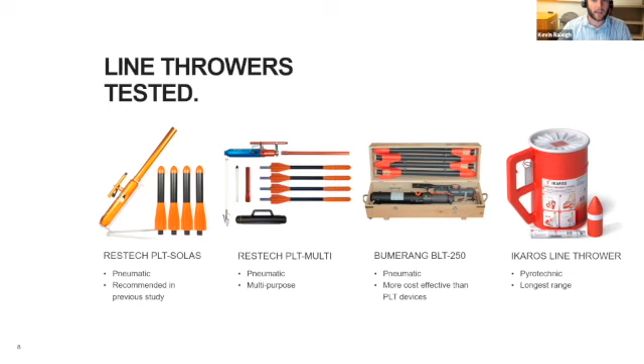What we were looking for when testing these devices were four main categories. We identified these before the trial: ease of use, which we broke down into ergonomics - how does it feel to use these devices, is the user impeded in any way by its form - and weight, similarly, is the device too heavy to be aimed accurately.

Effectiveness we broke down into the range of the device - how far can it fire, can it allow the tug to sit at a safe distance when it fires the projectile to the disabled vessel - and then accuracy and wind deflection. We need to be able to hit the disabled vessel, hopefully on our first try, so we want these devices to be accurate and reliable.

In terms of reliability, we wanted to look at how uniform the range was - was it hitting about the same distance every time, or was it all over the place? We need to know that these devices are going to perform as expected every single time.

How easy were they to reload? And then finally, what was the safety like? Did the operator feel that they had full control over the device, or did they feel that there was some sort of risk while they were firing it?

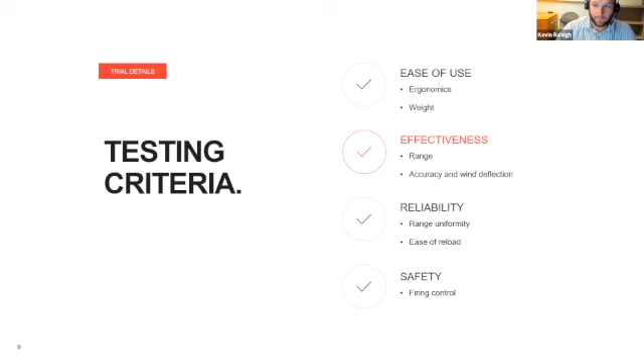During testing, a couple of criteria came up that we felt we really needed to add to our analysis that we hadn't anticipated. These were the crosswind line deflection. So what I mean by that is when we're firing perpendicular to the wind, we noticed that even when the projectile flew straight, the line attached to it was often caught by the wind and drifted downwind and missed its target. I'll show that more clearly on the next slide.

The other item we identified was the build quality of the devices. We didn't anticipate that the materials and manufacture of these devices would have such a serious impact not only on their performance, but also their safety and reliability.

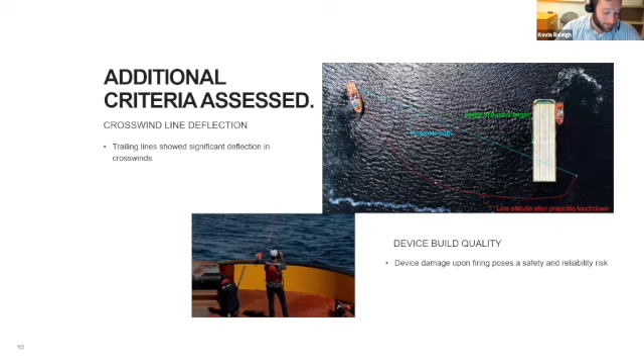So I wanted to show the line deflection in action. This is an aerial view of what our test looked like. On the left, you can see our rescue tug where we fire the devices from. On the right, you can see the barge made up to the other tug, simulating our disabled vessel. We're going to fire the Ikaros right over the top of the barge.

You can see the projectile as it's fired goes clean over the barge and lands right about there in the water. It's kind of hard to see on screen, but after firing, the line was still in the air and got caught by the wind and dragged all the way down and around the barge. So even though the operator fired directly over the barge and landed the projectile in the water on the other side, in a real world scenario they would have had to fire again to get the line on the barge of the disabled vessel so it could be picked up. That's why we had to identify this additional criteria.

Similarly, we identified device build quality as an issue. For example, when the Bumerang was fired, because it was made of plastic, it sort of blew apart upon firing, and the pieces not only posed a safety risk but also impacted the performance of the device, making it fly not quite as well as the other devices we tested. You'll see the Bumerang now as I play this, and as it's fired the rocket breaks up, parts are thrown across the deck, and the remaining part didn't fly quite as straight as it should have.

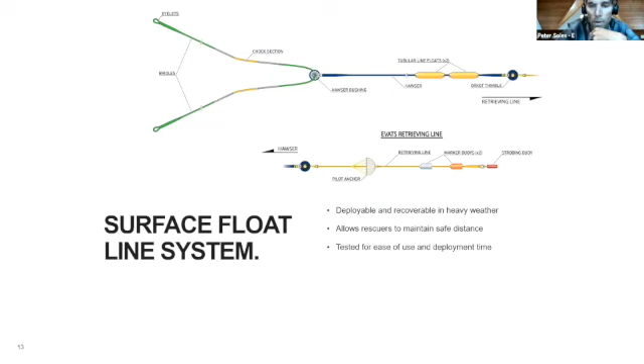So to evaluate a surface float line system, the one we opted to look at, since these aren't manufactured all over the place, and in a lot of cases they're almost stovepiped on deck, improvised. But Samson does make the EVATS system, an emergency towing kit that Glosten actually developed as part of a previous project.

That kit in itself is kind of like the Alaska emergency towing system. It's a complete towing kit, and what we wanted to do here is isolate just the retrieving line. So that upper piece there with the green bridle and the blue, that's the towing gear, so we left that part out of it.

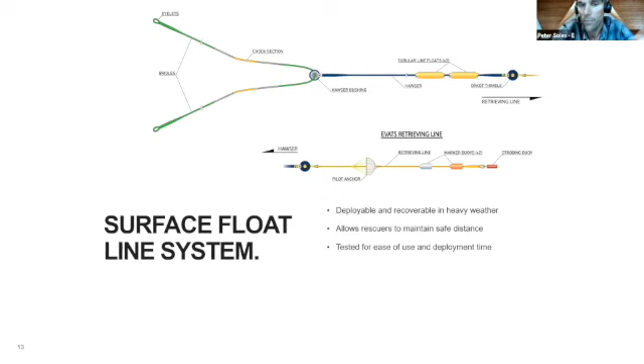If you advance the slide a bit, Kevin, this is what we looked at and evaluated as a surface float line. We had Samson manufacture this for this trial. What sets it apart from just being a piece of floating rope is namely that it has this drag anchor spliced onto the body of the line towards the end. This schematic is a little deceiving because the line is actually over 100 meters long, and the pilot anchor and all these floats and such are out towards the end.

As Kevin mentioned earlier, and he'll demonstrate this in a bit, when that pilot anchor inflates as the barge is drifting downwind, it pulls the whole retrieving system up in a straight line upwind, where a tug can swoop in and toss a grapple between those two floats and recover the system at a safe distance.

So this is what we looked at as far as the surface float line system. It's one component of the broader EVATS kit, so don't confuse those two. What we're looking at here is not EVATS, it's just representative of how a surface float line system should be constructed.

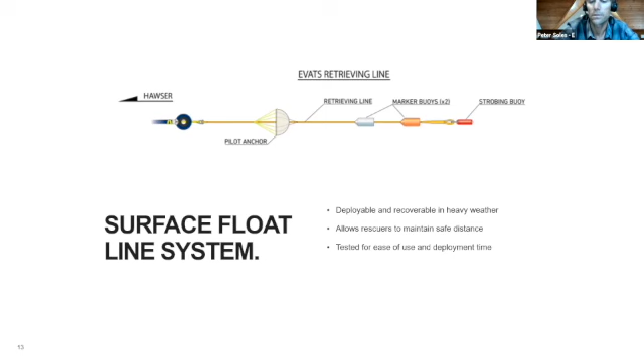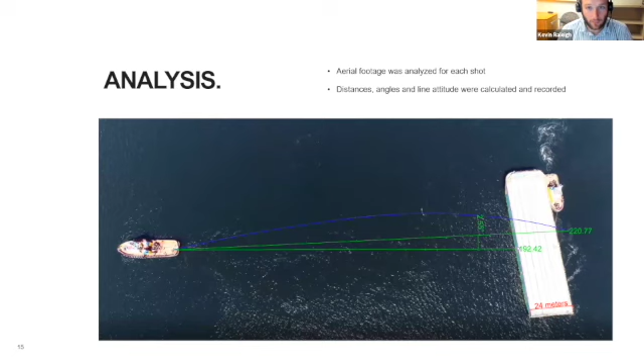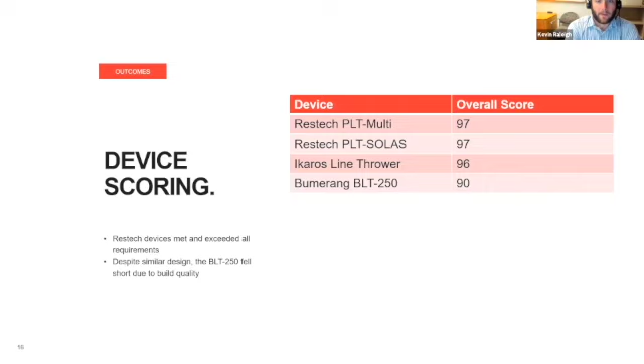The reason I want to pull up these scores is to identify one point about build quality: the Restech devices and the Bumerang were nearly identical in design and function, both pneumatic devices, but the Restechs really outperformed the Bumerang specifically because of build quality issues. The Bumerang's performance suffered because of things like the projectiles breaking and the housing not being made to the same spec as the Restech devices. That's a significant thing to consider when looking into these devices.

I'd like to talk more about what we can take away from those scores. You might have noticed all the devices scored within the 90 to 100 range, because they're all quite effective at doing what they're meant to do. But the real differences came from their range and accuracy ratings. Their fundamentals in terms of ergonomics, weight, how easily they were reloaded, and safety were all very good — they all performed quite well. But in terms of range, that's where their differences really showed up.

The pyrotechnic devices have a distinct range advantage. Every time we fired them, they went clear over the barge, really outperforming the others in range — which isn't to say the pneumatics did poorly. They met the test requirements, all hitting the barge or going past it as expected, but the pyrotechnics really shone in the range category.

On the flip side, with accuracy, the pyrotechnics, largely due to their design, were the hardest to aim and seemed most susceptible to deflection. Part of this had to do with the shot line attached, which was not quite the same quality as the pneumatic devices, leading to it being pulled downwind because of more windage. The pneumatics, on the other hand, were incredibly precise, very easy to aim, and didn't suffer the same wind deflection, or at least not the same magnitude.

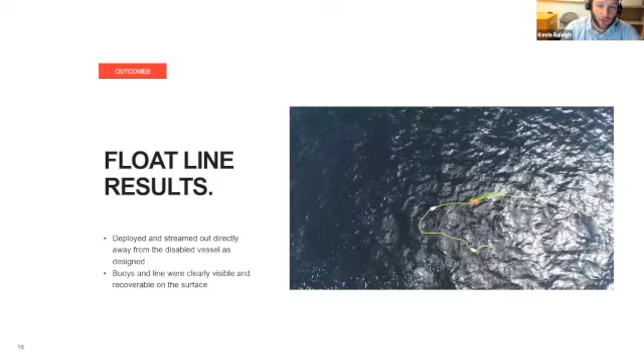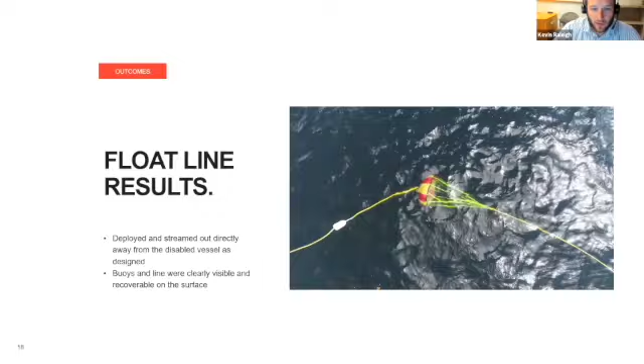Like Peter mentioned, I'm going to show right now the pilot anchor as it's being inflated in the water. You can see right at the top there, in red and yellow — it's sort of an underwater parachute, and it's going to catch the water and start to inflate. That's what lets it drag in the water behind the drifting ship and allows the line to stream out. There it is, fully inflating, and you can see the line almost getting taut as it's being pulled away behind the barge drifting.

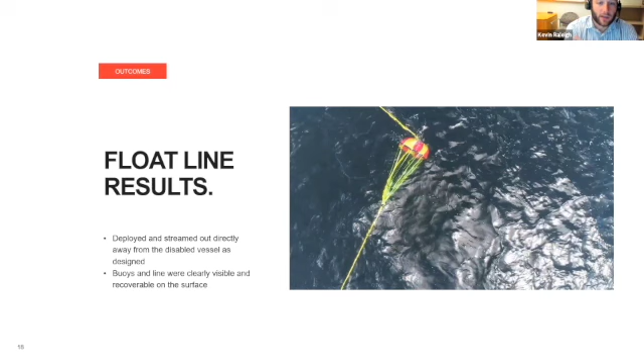So that is ideal for a situation where you have a disabled vessel that can drop this in the water and allow it to stream out while a rescue tug is coming to recover it, before it's even come to the area that the disabled vessel is in.

So let's talk just a little bit about the significance that comes from these results. I'll start with the pneumatic devices. As I've said, these were highly accurate, they were easy to use, and they hit all of the points we set out for them perfectly. They really achieved what they set out to do.

And for the purposes of this council, I'd like to point out the benefits of having a passive projectile. It really makes them ideal for tanker operations. It adds a lot of peace of mind to not have to worry about having some sort of flaming projectile going towards a tanker vessel, both in terms of the cargo and in terms of the crew.

So you're going to see here your own Alan Sorum firing one of those devices towards our barge. And it goes straight over. It might be a little hard to see on your screens, but it went clear over the other side and landed the line right on the barge.

The pyrotechnic devices really can't overstate their exceptional range capability. In another use case, these would be excellent in open water where you're not worried about flammable cargo.

They were slightly more difficult to aim. As you can see there, Peter's got one on his leg, and that's how you have to fire it, from the thigh. So you can't exactly aim down the barrel like you could with the pneumatic devices, which made them a little bit harder to aim and harder to get that accuracy. And as I said, the incendiary projectile is the real safety risk there. So you can see how the propellant comes out here when it's fired.

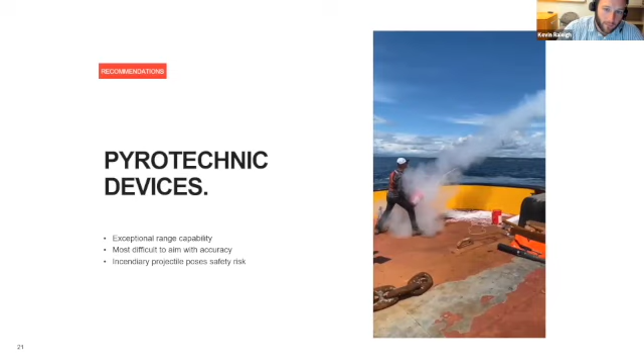And don't worry, we've got another video of Alan firing one too.

So as you can see, it goes clear over the barge. If you can catch it on the other side. Yep, you can see the line deflection there too that Kevin was talking about, where immediately it just starts blowing downwind, because this particular nylon line they used was twisting as it deployed, and so that created a lot of extra windage.

It's visible right here in this video, so it's kind of interesting. Yeah, that's an excellent point and another perspective on seeing that line deflection. So here it goes. You can just see it spooling out to the right, like Peter mentioned.

In terms of the surface float line, as I said, it performed exactly as expected. You can see the way that it's deployed out straight away from the barge. This is exactly what you want with a disabled vessel, because it gives the rescuing tug a ton of room to come sweep in and pick up the line. Yep, and they can stay on the upwind side, which is where you want to be. You don't want to be on the downwind side.

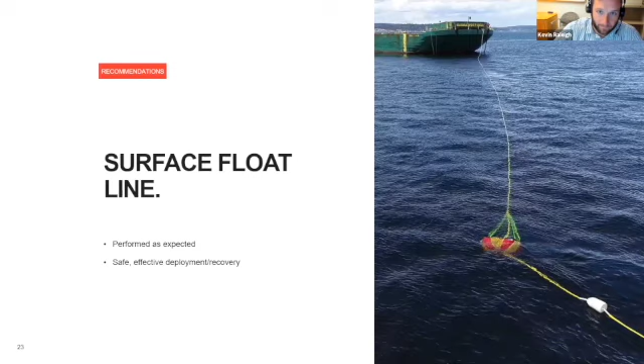So just to sum it all up, what are our major takeaways? Well, all the devices that were identified from the previous study were competitive. They all did what they set out to do. But when it comes to defining the best technology, it's going to be situationally dependent.

So that sort of goes back to what I was talking about with tankers and how pyrotechnics might not be the best there. So when we look at pneumatics, they're going to be the standard. They're safe and effective, a great way to make contact. They really met all the marks.

In terms of the float line, this is something that would be fantastic to have on board a number of ships. They're really suited to high wind and seas. And something that I just touched on before is that they can be dropped in the water long before the rescue tug is even in the area.

Once the ship knows that it's disabled and in need of help, they can drop this in the water, communicate with the tug, and let them know where it's streamed out, what the heading is, where to pick it up, and how long it is. And all the tug needs to do is pick it up out of the water, pass the towing gear, and they're on their way.

Pyrotechnics. Well, I was just going to add, in a situation where you had a disabled vessel that's only a short distance from shore—and short distance is really anything less than 25 miles, I would say—this is a huge advantage because it's a real time saver. And particularly if wind speeds are high and significant wave heights are high, you can really get away from all that messing around. It's a dangerous situation if you're trying to pass those lines in close proximity.